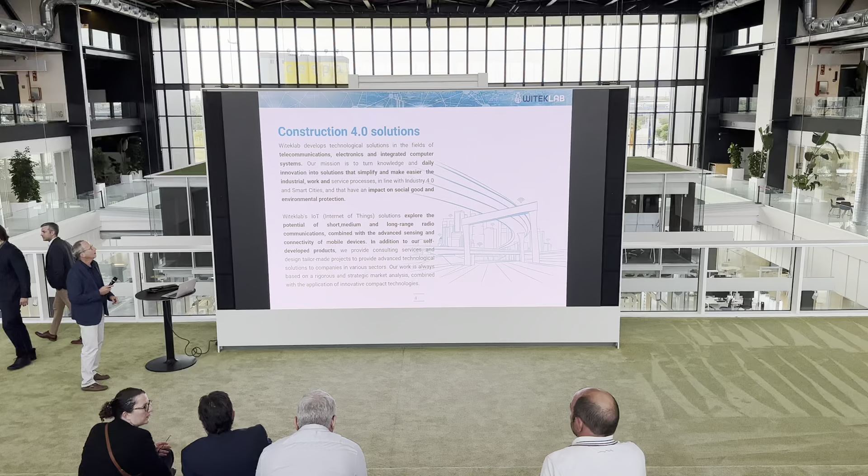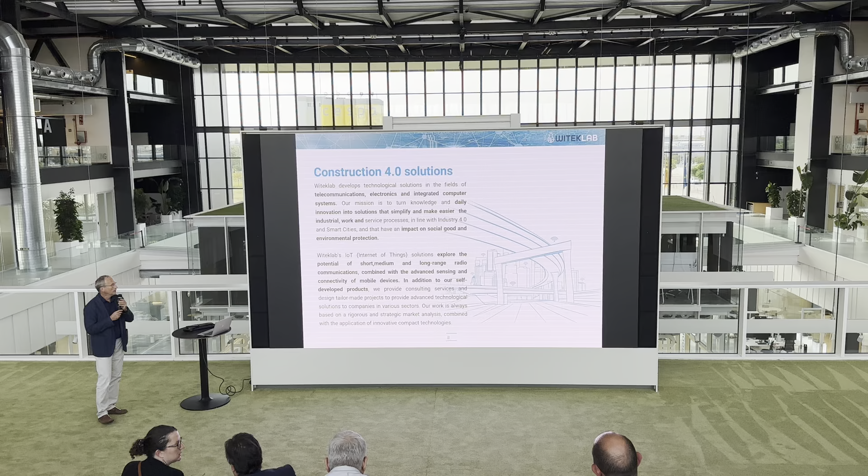Our company has focused on developing solutions for construction and infrastructure. Our philosophy is, in comparison to other presentations before, that we are a hardware-based company but we also develop software to provide the data to the customer. But mainly we do a lot of research in developing very innovative sensors that are difficult to find in the market. So we implement IoT solutions, software, gateways, and on top of that also the platform and cloud solutions.

Our main strengths are smart sensors. We already have some patents because some physical phenomena you need to really go very deep in detail and be very innovative and creative. This is why we have many projects with universities here in Spain and outside.

Radio communications, because at the end we want to send something, get the data and transmit it in different environments. Infrastructures are not very nice, somehow welcoming environments where we can communicate everywhere, anywhere. We need to communicate sometimes, get signals with a passive sensor from underground, or in the concrete. When the concrete is pouring, there's a lot of water, and everybody knows that radio waves don't communicate in water. So we try to get the signal out of that environment.

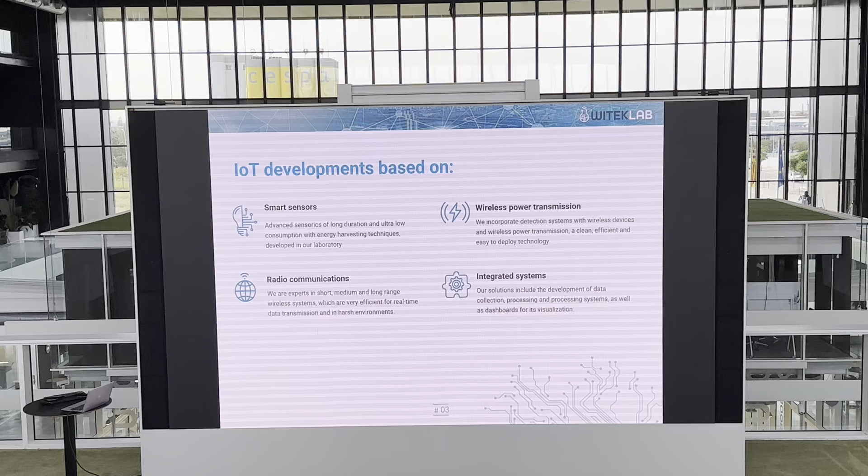In some sensors, we play around with wireless, transmitting not only information but power, and integrate the systems into a platform, integrating everything to provide the global solution to the customer. So from the sensor to the data. Maybe someone will then work on the data to optimize, but we need to show the data to the customer.

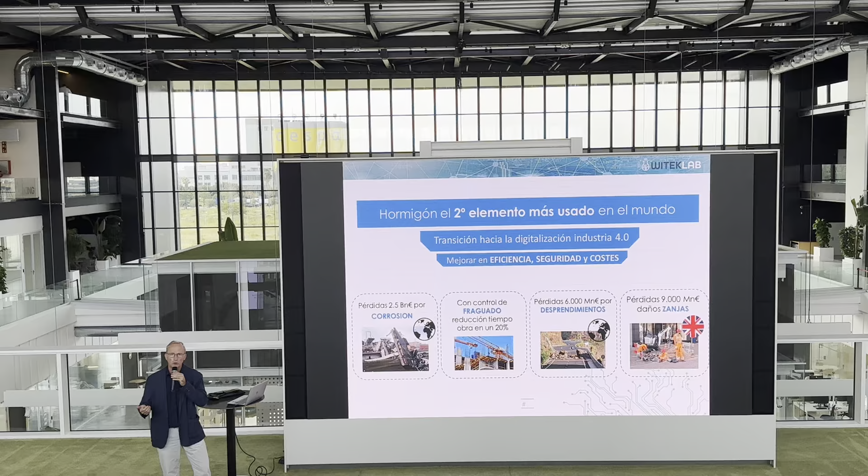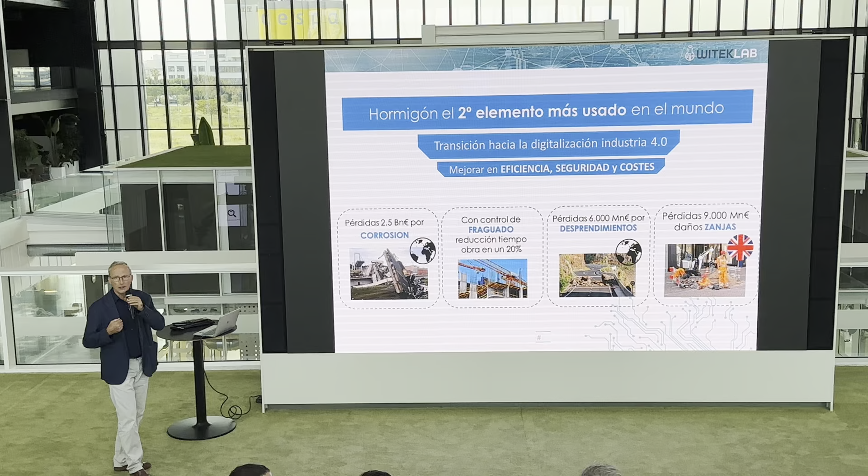The concrete is the second element most used worldwide, the first is water. Concrete really needs to integrate into this digitalization in construction 4.0, what is known now. Our aim is to improve efficiency, security, and cost for the company.

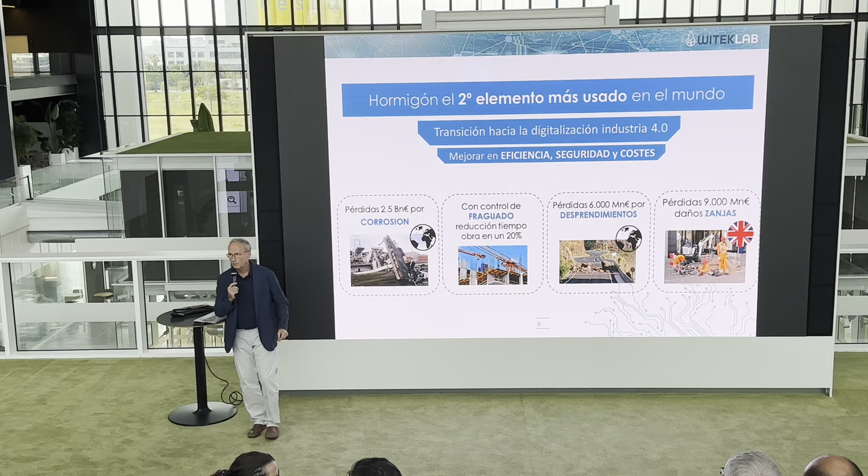So introducing sensors, for example for corrosion, which is one of the most critical problems in infrastructures nowadays, because it costs a lot of losses worldwide. It's computed at like 2.5 billion euros of cost losses for corrosion problems. Let's say a bridge gets corroded, it can go down. A lot of buildings and constructions can really have this problem.

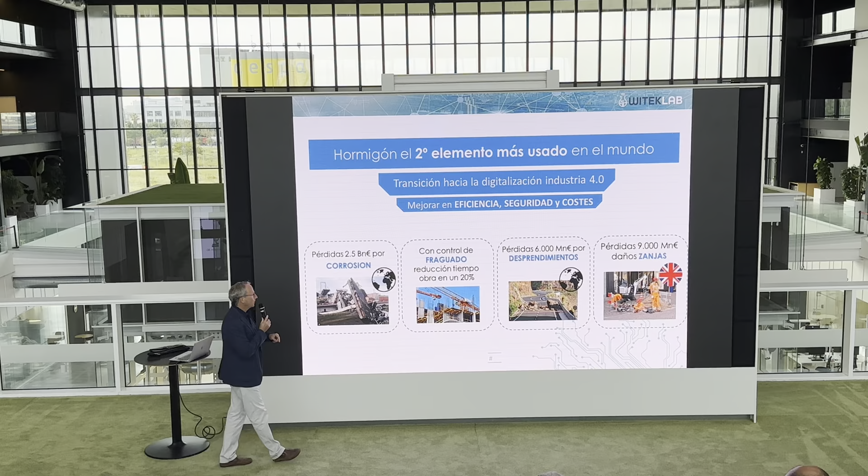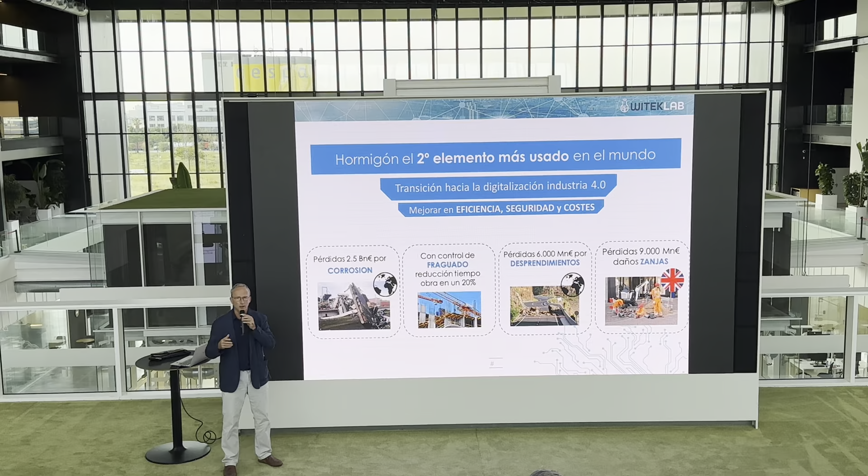This is concrete. When you make a building, you need to pour the concrete, and the concrete starts to gain some strength. So what we do is we monitor this strength instead of doing it in the laboratory by breaking specimens. We integrate some sensors, locate them in special parts, and then we are monitoring what is the strength of the concrete. And here we can improve, as I will show you later, the efficiency of construction, the time and the cost very fast, like 20 to 30 percent in some cases.

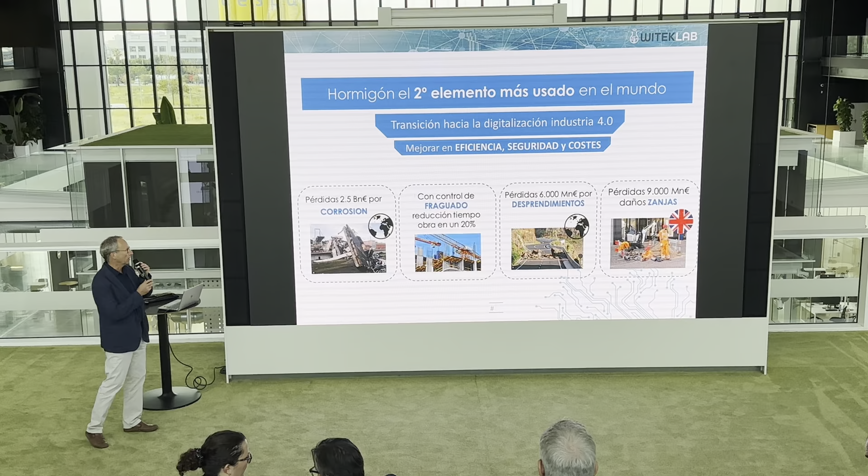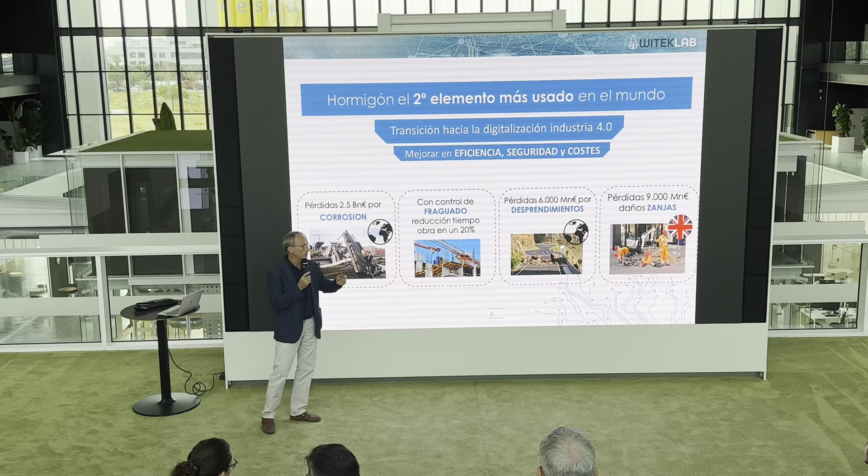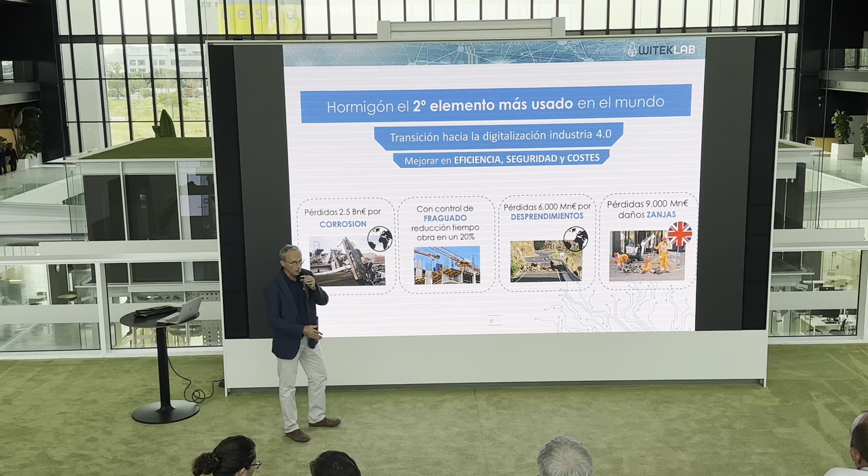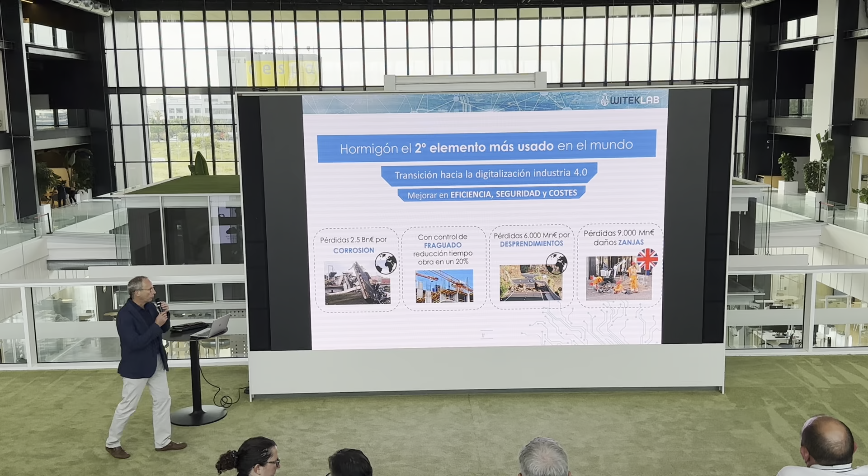For falling rocks in the mountain, there is also a lot of causes due to this in roads, highways, and trains, which can cause rocks to fall onto the road. For digging trenches in the street or in the field, there is also a high cost of losses, and the UK has put values of 9,000 million euros per year on this. That's the cost not only for damages, but also for prospections, how much time you close one road, what you have to tell pedestrians, avoiding them going through that. So all the nuisances for the citizens, etc.

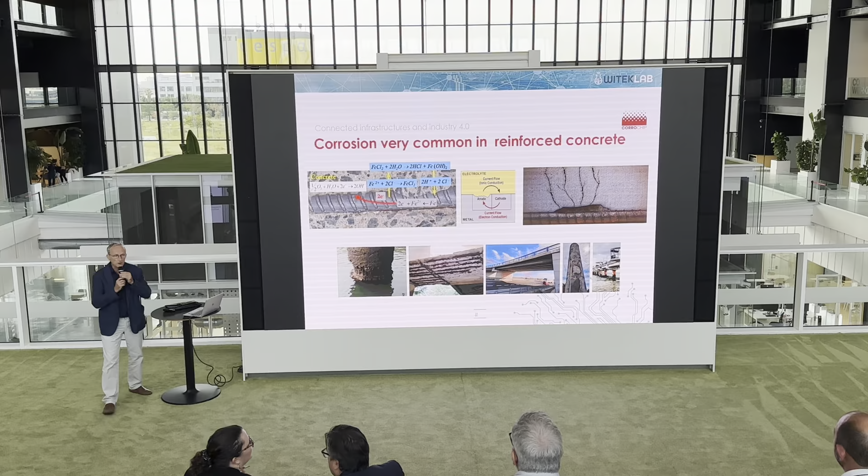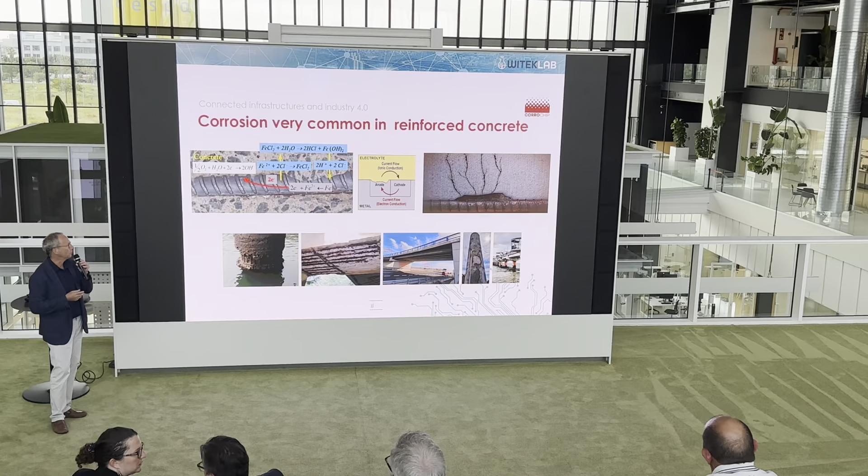For that, I would like to start first with corrosion. To understand a little bit, I guess you already know what a construction looks like without the concrete, when it's already falling down. Why? Because there is a current flowing through the metal. The metal is the one that gives you the biggest strength of the building or structure. So civil engineers make calculations, simulations, whatever, and they put some metal rebars, and then you pour the concrete.

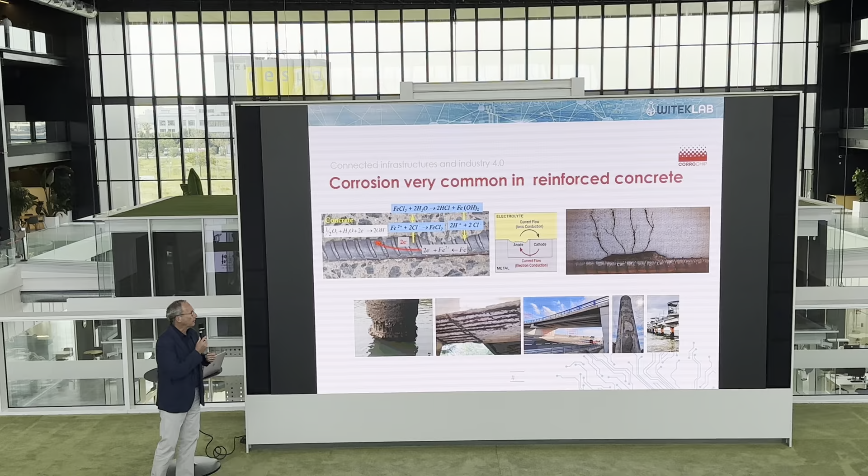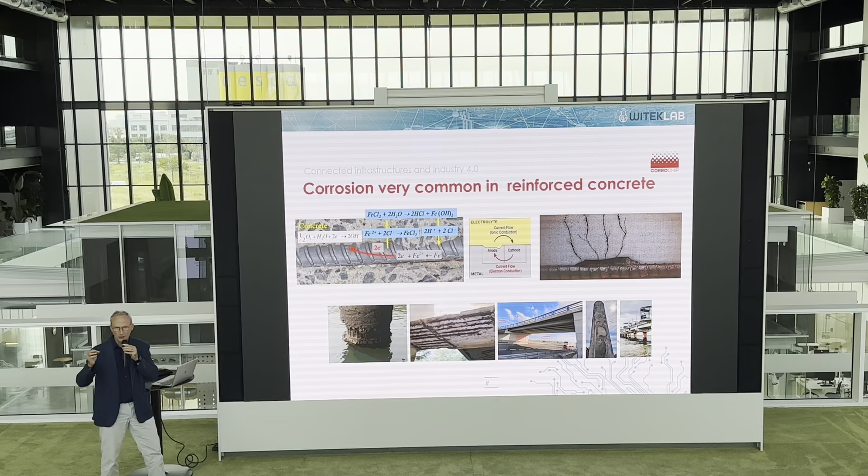And you expect that there is resistance of that building for many years. But what happens sometimes is that there are some cracks, you are close to the sea, you have salt, there are lorries on the bridge that are causing micro damages in the concrete, and there is a penetration of some agents which can cause a current flowing through the electrical parts of the structure. What happens with this current? It starts to oxidize.

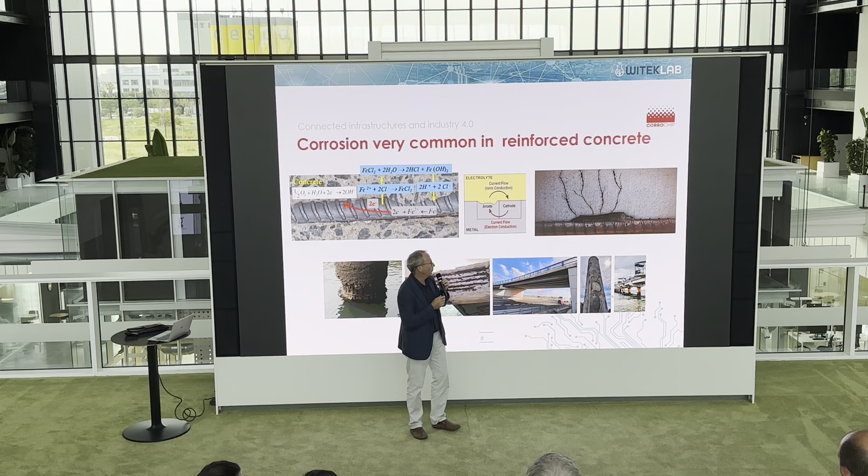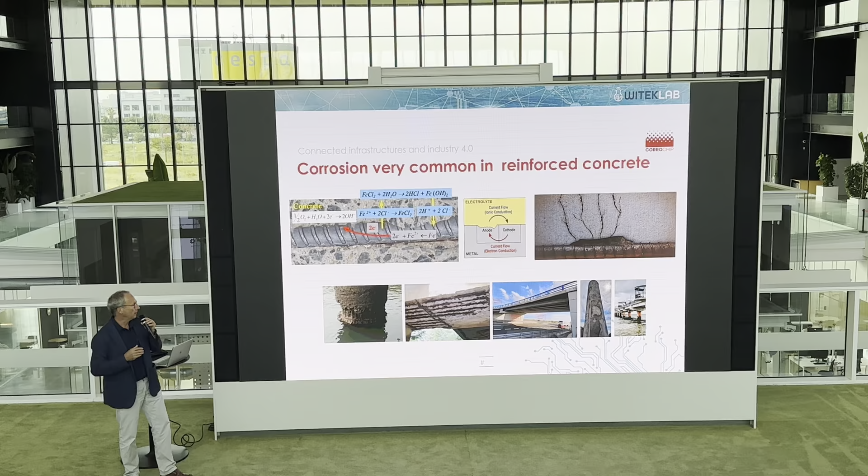When there is oxide here, two things happen. One is that the concrete cracks and can break, and the other is that the thickness of the metal decreases. So instead of having like 20 millimeters thickness rebar, or 30, 35 depending on the calculations, this goes down, and then it can become dangerous for people next to the buildings or next to the infrastructure.

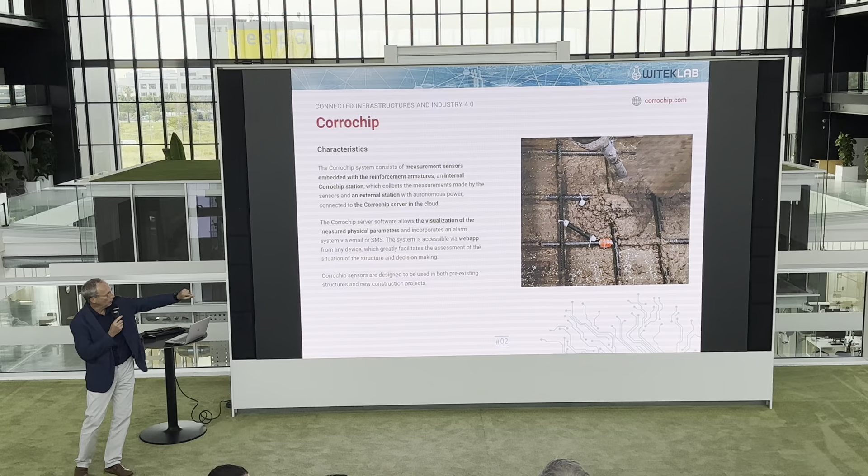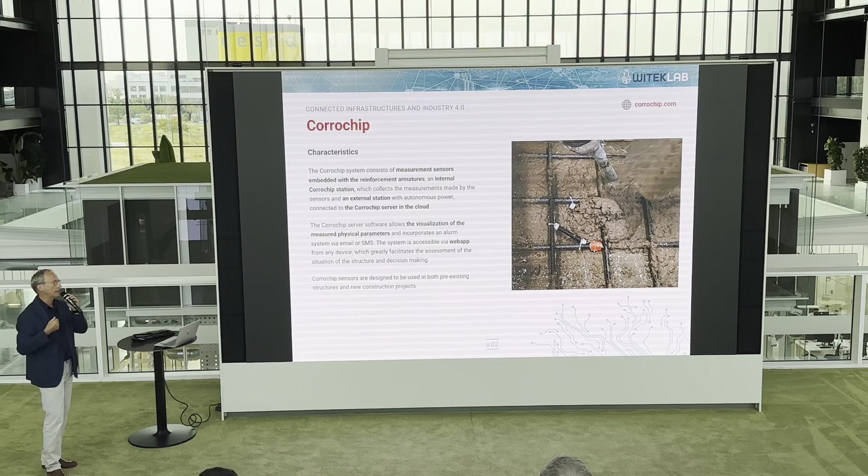So what do we do? We measure in a way that until now nobody has done, because we integrate the sensors inside the structures. If it's a new structure, it's very good because we have some sensory elements that can be tied to the rebar, and then you pour the concrete. You get the cables out, this is the cable solution, so we put the cables outside, and we start monitoring the currents inside from the first minute of the structure, of the building.

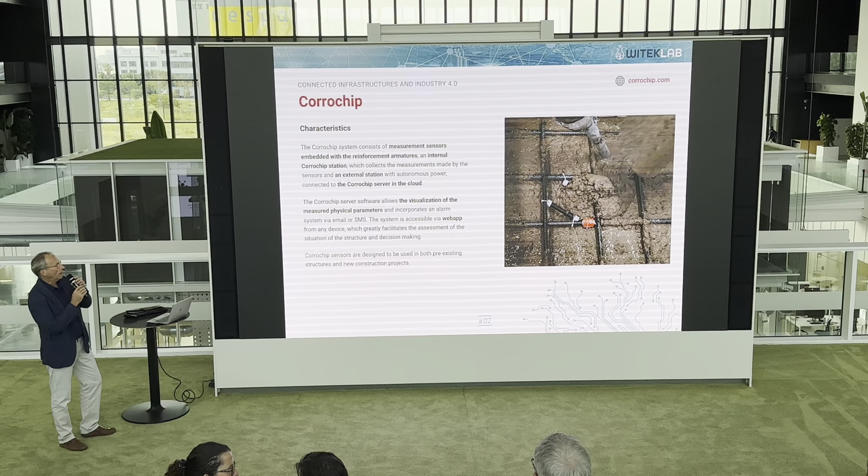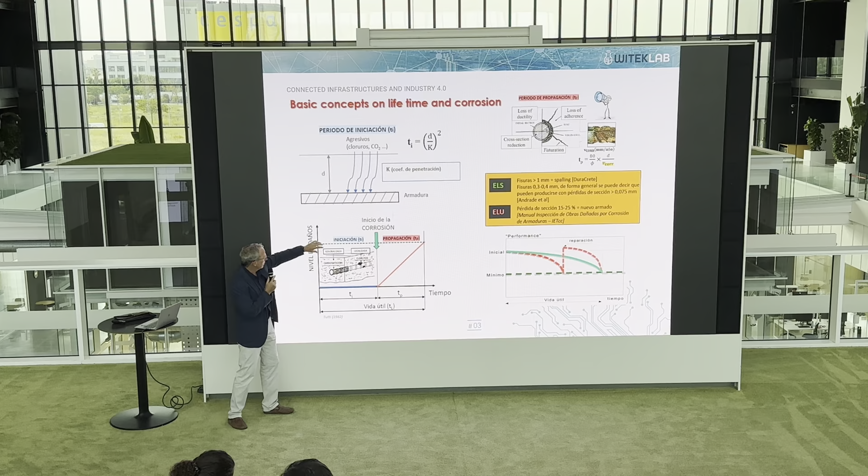We have several different types of what we call electrodes, so they measure different things, the different parameters. All of them are passive because they must last the whole life of the structure. This is the physical meaning of this. We published many papers on this, but the idea is: can we start measuring the penetration of the agents that contaminate the rebar, and also, when there is a current here, calculate the corrosion in the rebar?

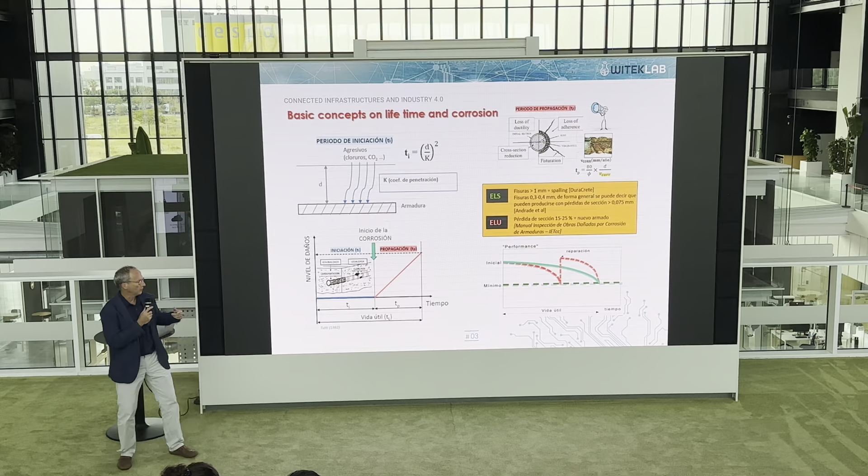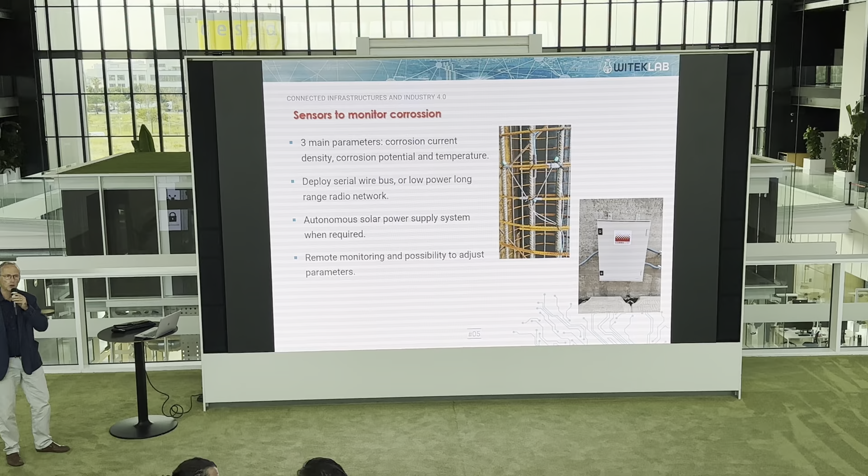So we have two sensors. One is to detect when the agents start to penetrate the concrete, and another one when they are already in the metal rebar. Okay. Our solution started more than 10 years ago with some PhD theses. Then we developed the first prototypes together with CSIC, the research center of Spain. And then we already implemented some pilots.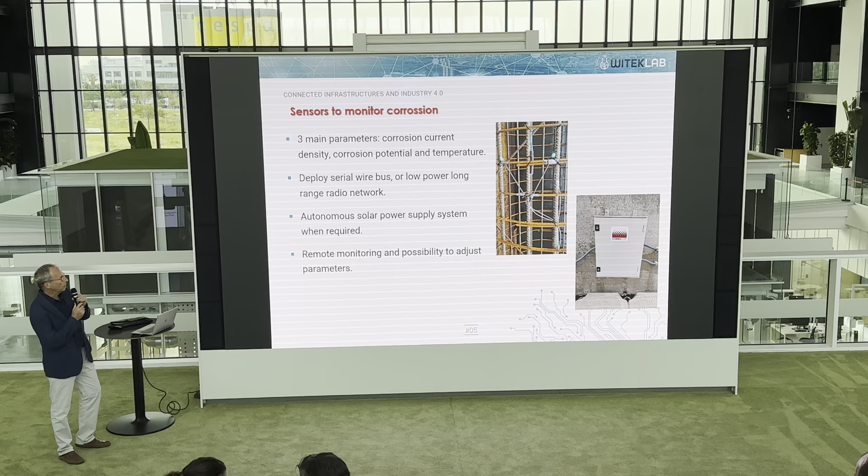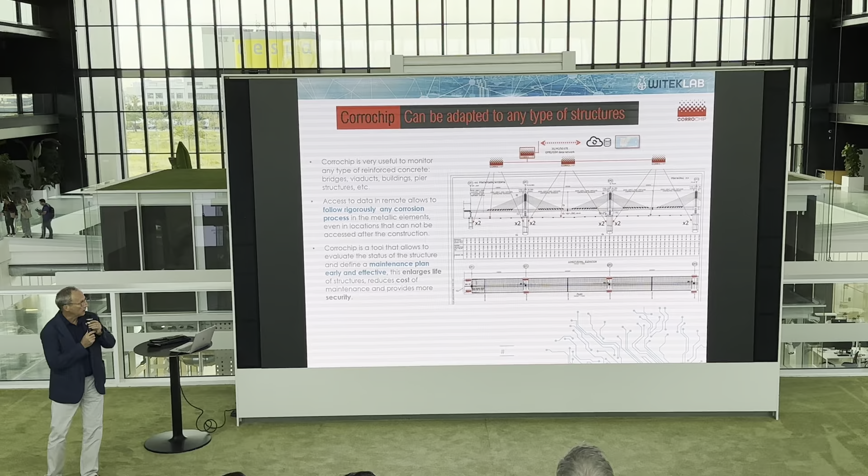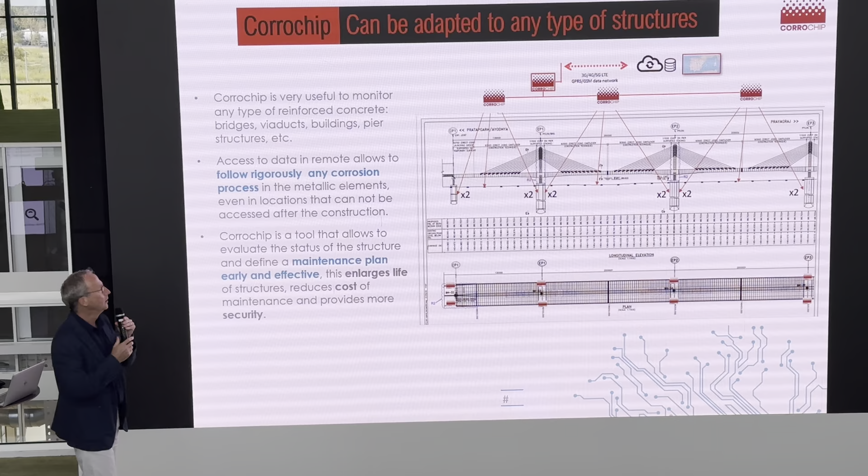These are pilots in different areas. I can show you, for example, this is a bridge where it makes a lot of sense, but it is a new bridge. So people ask, okay, where can we put the sensors? How can we monitor not only the place where the trucks, the lorries, the cars will go through, but also the pillars? This will be underwater, so can we measure underwater? And then we start working together with the architects and civil engineers to place the different sensors.

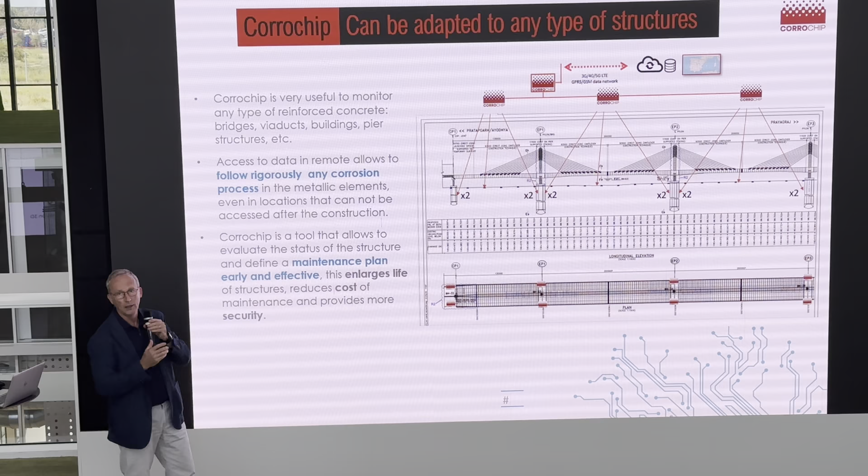If it's a new structure, it's very easy. For us, it's easy to go there and in one day we can already install many sensors. If it's a structure that has already been damaged, we can install it, but it takes more effort, because we need to put the sensor inside. So we need access to make some drills, then have some contacts, put the cables outside, the data logger, and then we already have the data. Then we show them on the platform. Okay, this is a dashboard that we use. Yes.

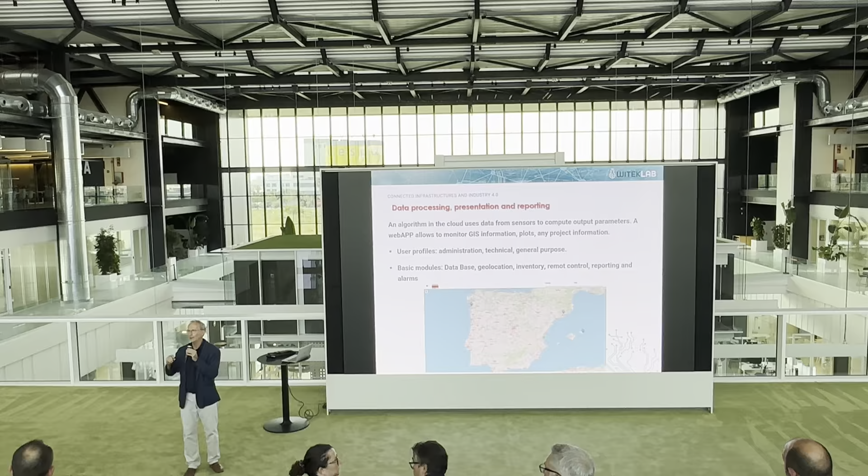Yes, yes. There is an electrode, the sensor is inside the concrete. We put cables outside, and we have a data logger. There is a small electronic unit that does the measurements at every different point. In this case everything is wired, so sometimes we reuse wired communications in the bridge, for example, or we create a new wiring system, because we need to collect all the data from the wires to a central station that sends it to the cloud.

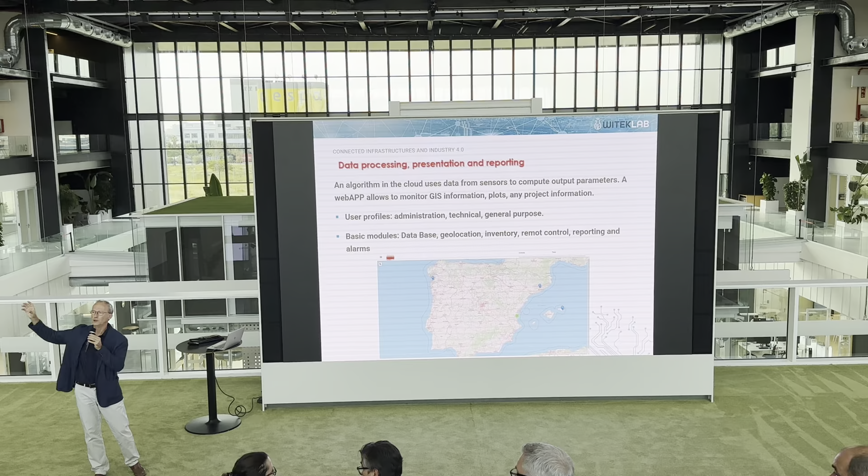But the sensor inside is passive, it's a kind of electrode that we make, with no battery, and it will last as long as the structure. What needs maintenance is outside: the data logger, we need to do maintenance on that. It has a life duration. If it corrodes itself? Yes, this is what we do.

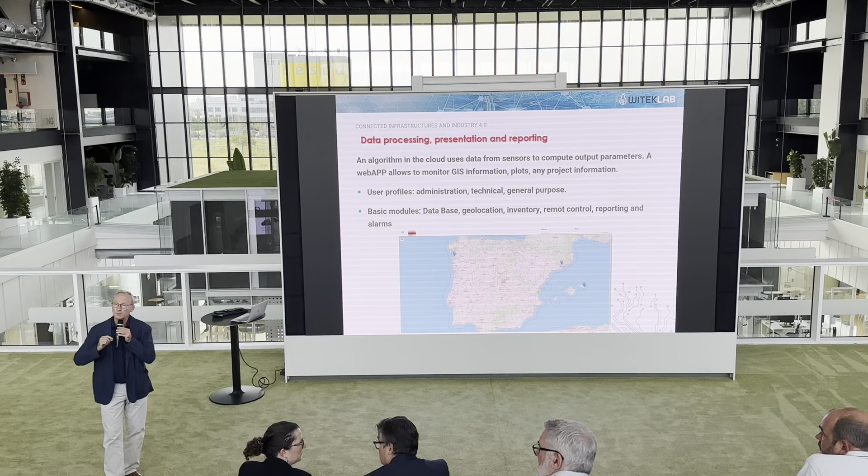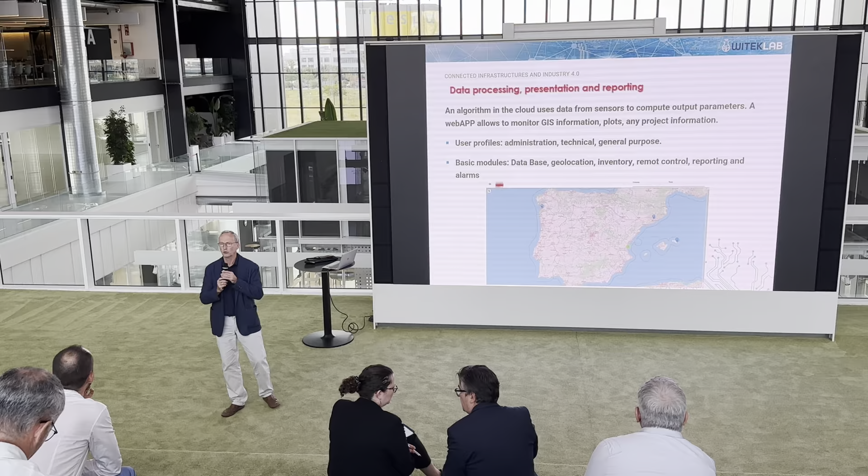We measure the speed of corrosion, the corrosion current, parameters that nowadays are quite difficult to measure, because what people do is manual inspections, go there to measure the corrosion voltage or potential, and then go back half a year or a year later. What we do is one measurement per day, so we can see the speed of corrosion, how this speed progresses, and then we can give a warning. So in some installations, at some points, it's better to do maintenance to extend the lifetime of, let's say, a bridge. Maybe much more than the lifetime of the sensor itself.

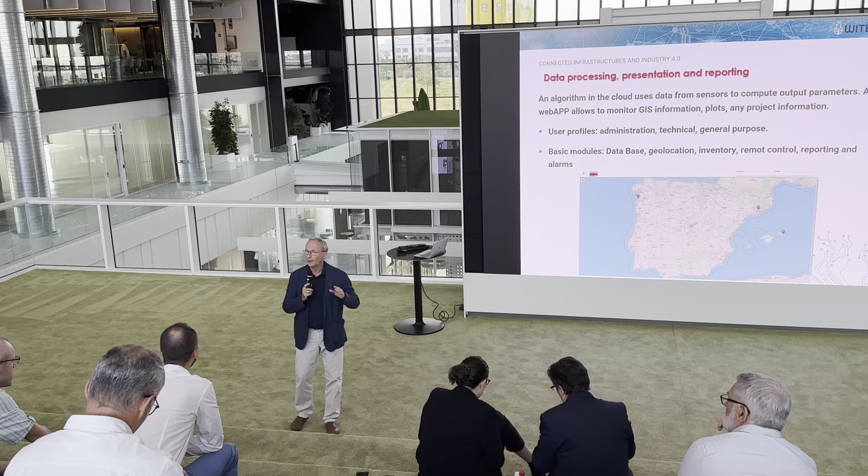It will end. It's the same material as the rebar of the structure. So our sensor is made with the same material as the rebar, but new. So if there is a metal rebar with some alloy or some aluminum, whatever, we do the same. So if corrosion happens at some rate in the infrastructure, our sensor will corrode as well.

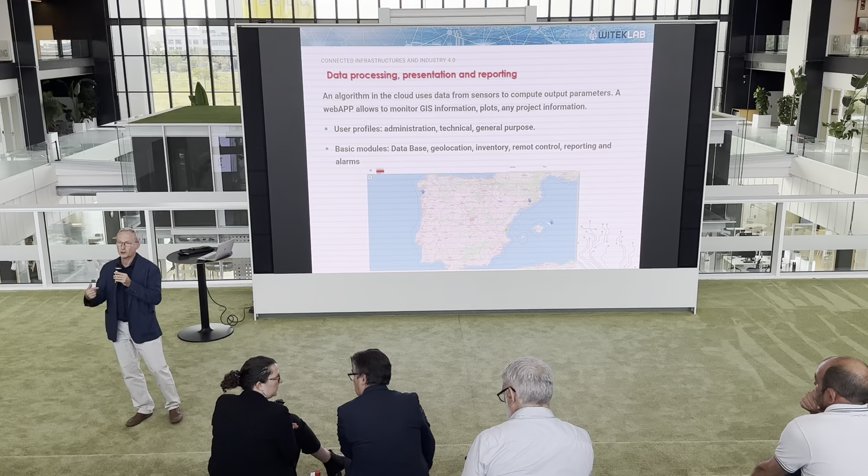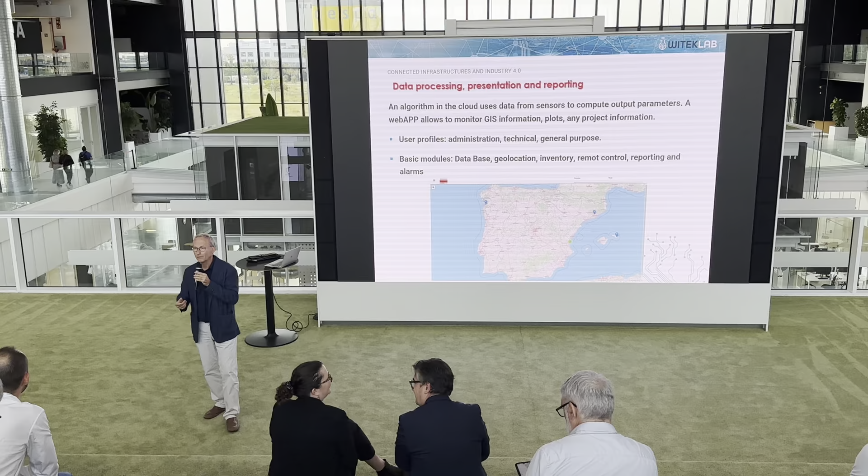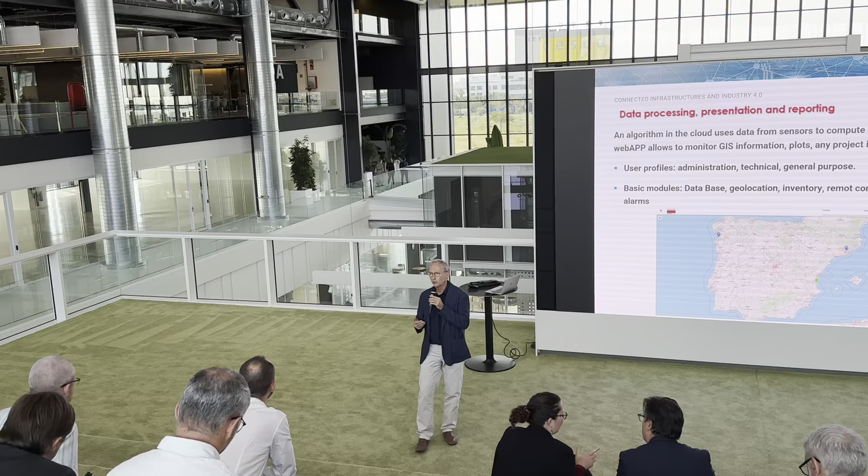We have patented the way to introduce the current pulses so as not to affect the currents inside, because if you inject some current, you can affect the speed of corrosion. So we need to inject a pulse to do the measurement without affecting the system itself. This is our main idea. Our sensor will corrode as well. What's the life duration that you guarantee to clients?

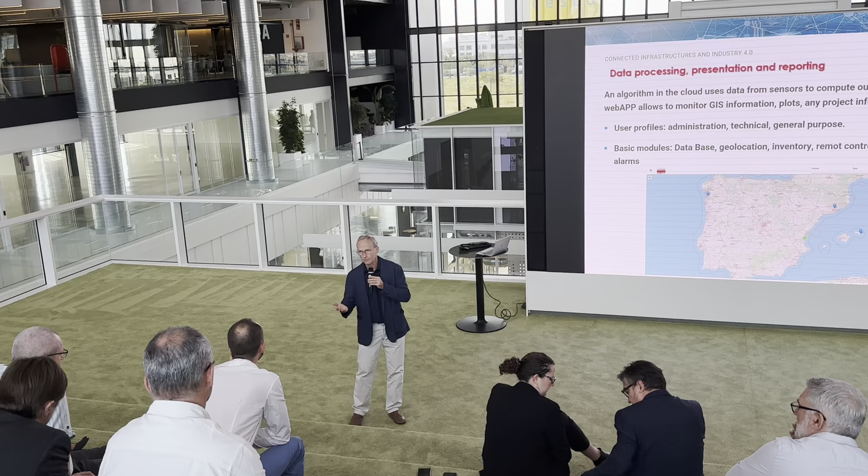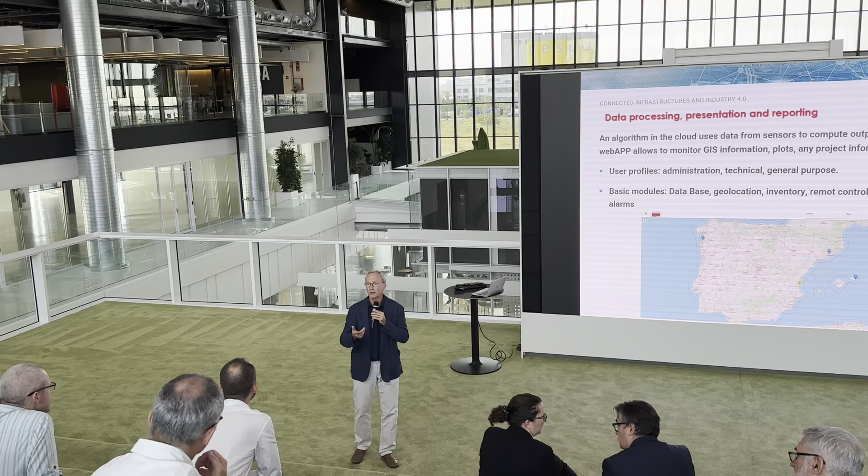If the bridge, for example, lasts 30 years, our sensor will last 30 years, or 15 years. The important thing is that the corrosion or erosion of our sensor will be exactly the same as the structure. What needs maintenance is the electronics outside, because some systems are solar or battery powered, and we need to maintain that.

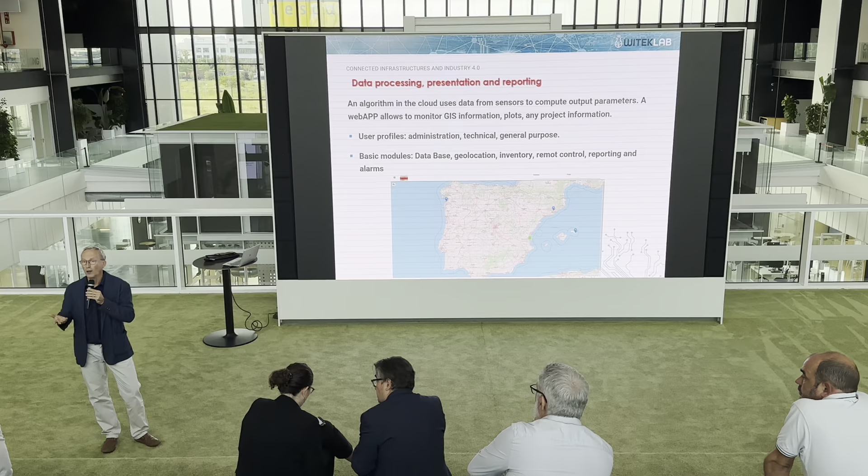But the sensor itself, if there is corrosion with, for example, a loss of thickness of 3 millimeters, our sensor will degrade the same, but it will work. Why? Because of the way we measure: we do one measurement per day, we send some pulses, do the measurement, sleep, and the next day, the next measurement.

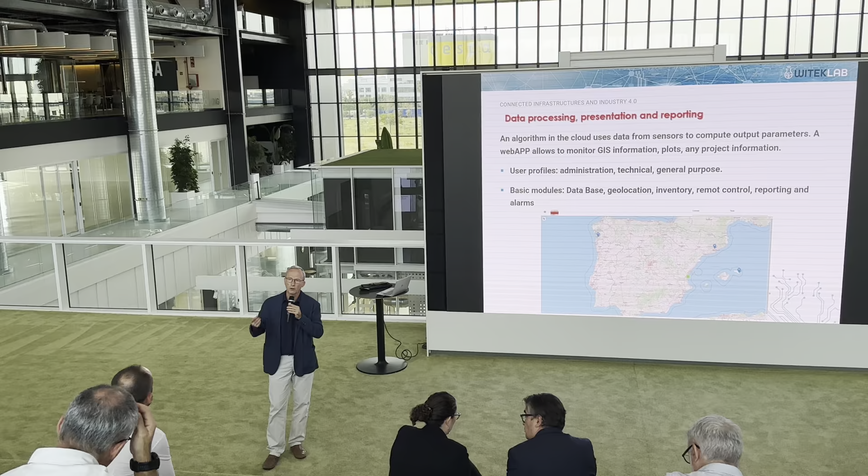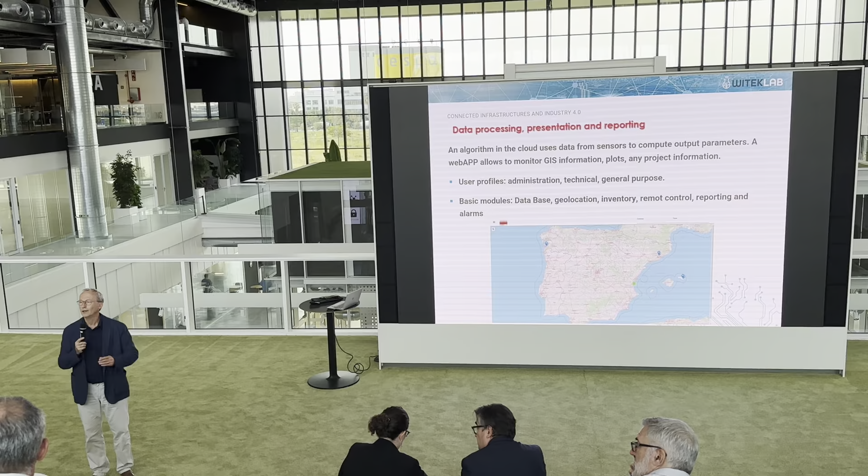To be sure that I have understood: your sensor is made of the same material as the structure, so it corrodes and you measure the corrosion of your sensor. Yeah. So if there is no corrosion, our sensor will not corrode and we will measure nothing. And then if there is some corrosion, we can start measuring it, and the speed of corrosion. What is the micrometers that we lost per year, for example?

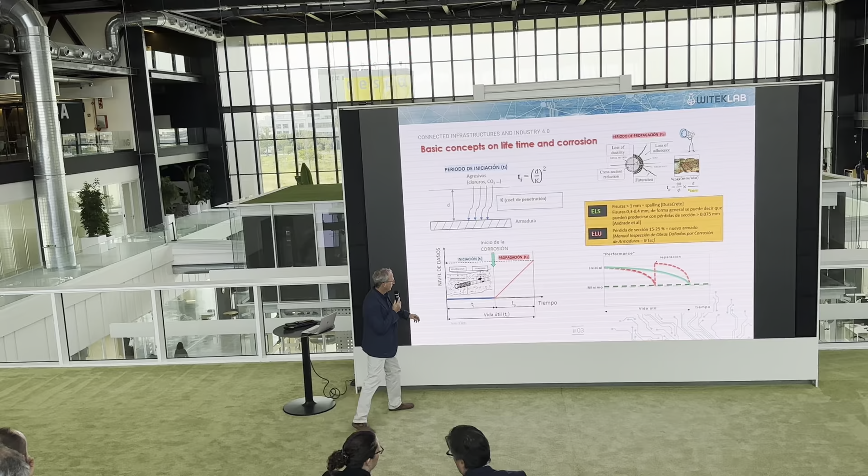This is very important because people can already foresee what repair they need and say, okay, in 3 years maybe I go. Here, maybe this is more indicative. There is the lifetime of the sensor, and maybe you can still spend 10 years without any corrosion at all.

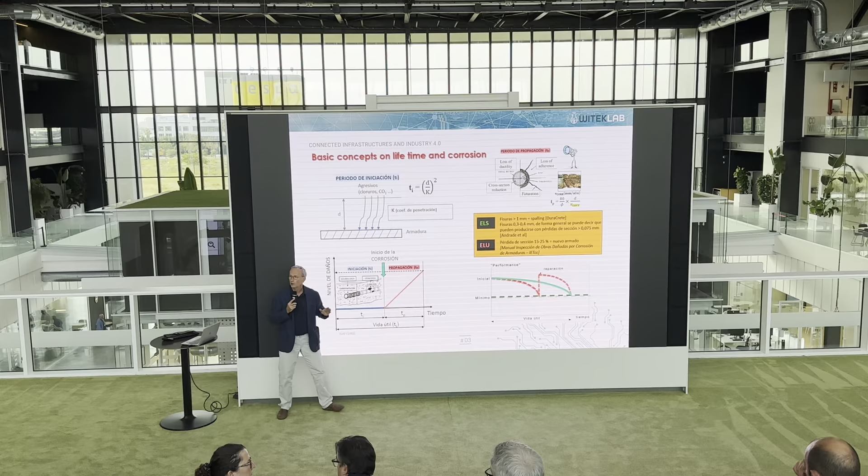And then there is what is called the propagation phase, where we have a loss of thickness. This loss of thickness can correlate as well with the currents that start flowing through the structure. And if there is a point where these currents really start going high very fast, we need to inform about that, and this is the critical part.

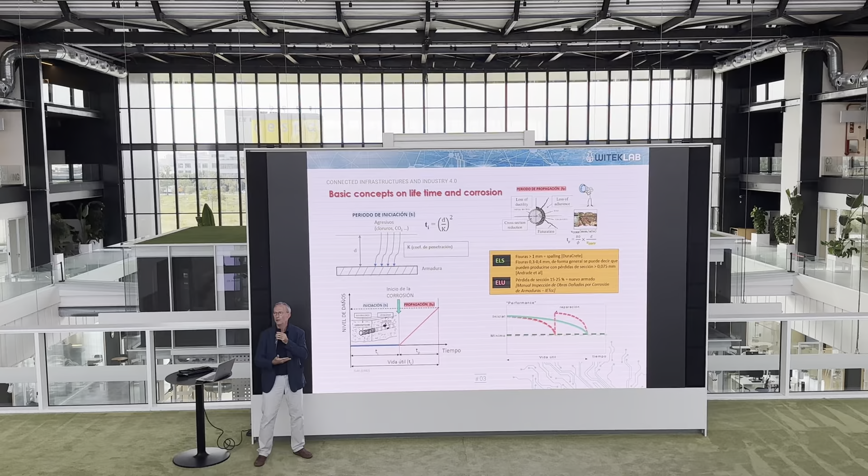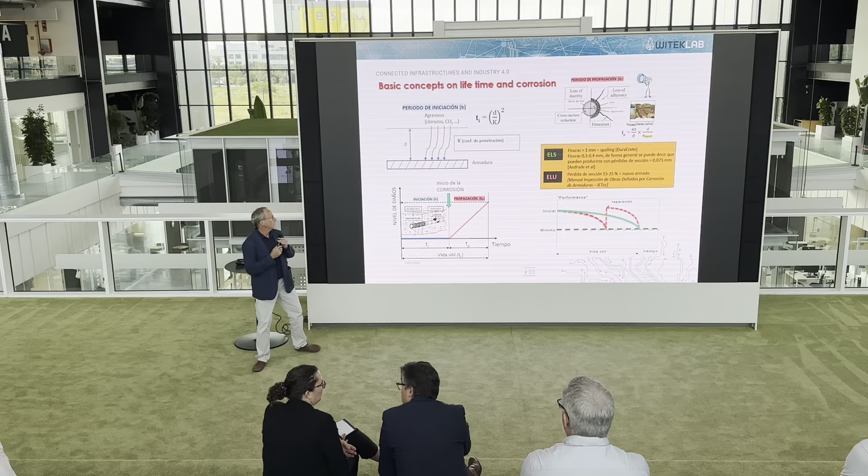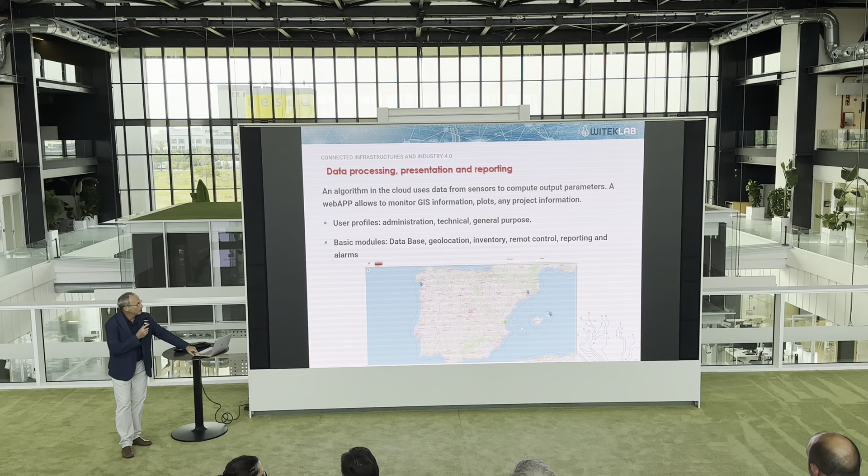And then it's better to repair it, to fix it, and then you can extend the life of the structure for many years. So the important part is to be able to measure this initialization and propagation. Okay, then we put this into a dashboard as well. We send automatic reports every 3 months to our customers, so they can know if there is an incident. For example, solar power sensors, gateways that take the data.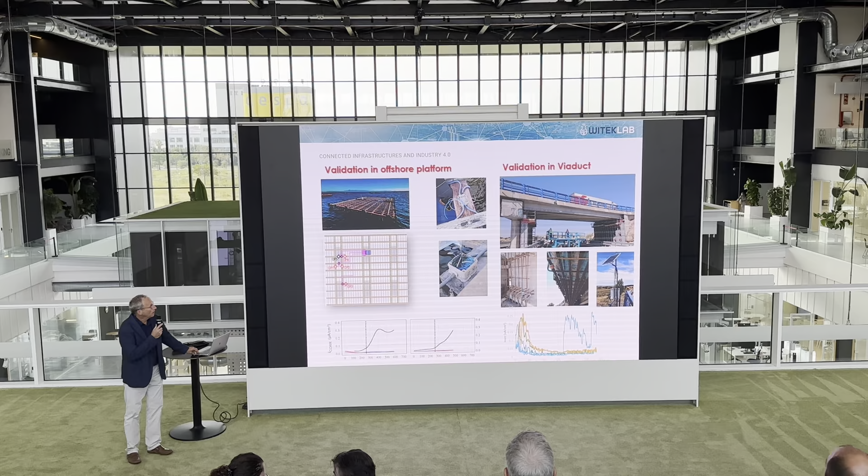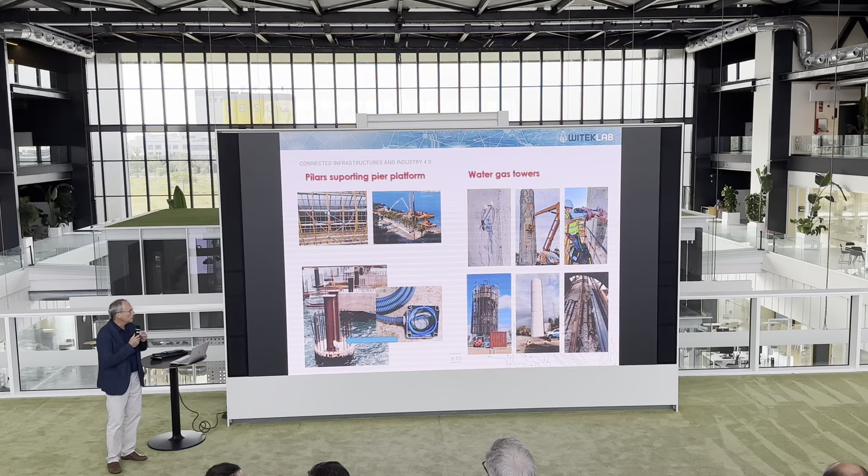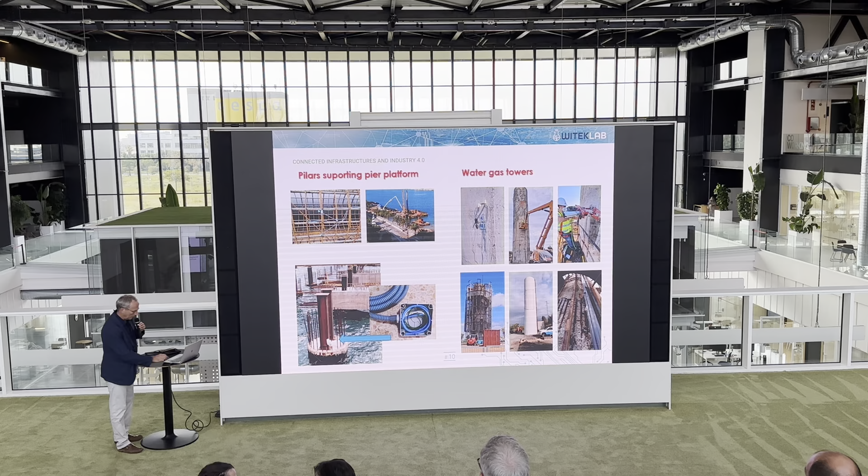Of course, we have already implemented this in different real use cases: highways between Madrid and Barcelona, on the ocean for mussel growing platforms, in the pier in the Balearics, in different places. We are starting; we passed the pilot, now we are already selling this, so we are now growing a little bit with more demand to install these sensors, because this has already been validated, I will show later, with the main companies in Spain. And okay, for corrosion, that's it.

Maybe I will go only 1 minute. I go really fast, maybe. 2 minutes. Okay. Thank you. I will go through that very fast because I have also many slides,

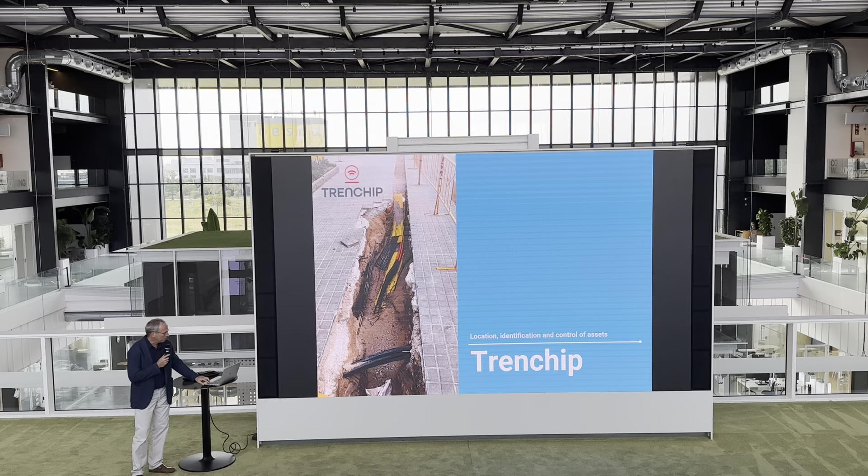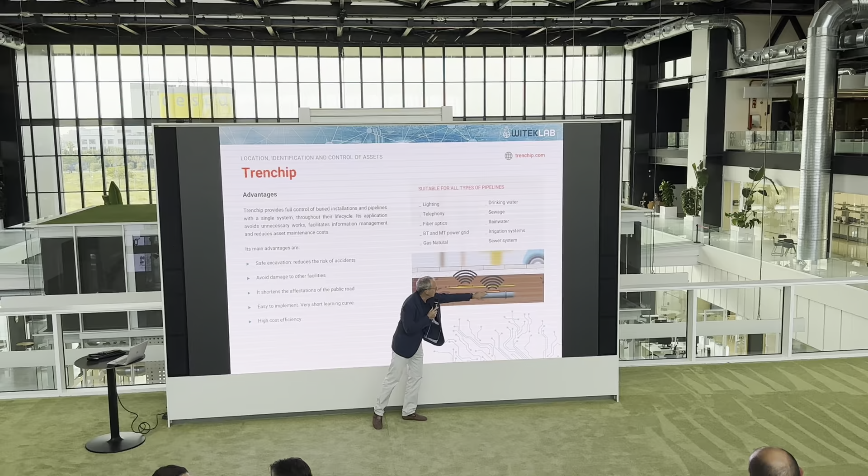but just for you to have an idea. Trenchip: what we do is we put a chip on the pipes underground. Okay, this is passive. It's like RFID. We optimize the antenna design to get the signal very deep. So then what happens? We can digitalize the underground structures because we can detect not only what you can find underground, but also all the information related to the utilities: gas, water pipes, electricity pipes, fiber optics, etc.

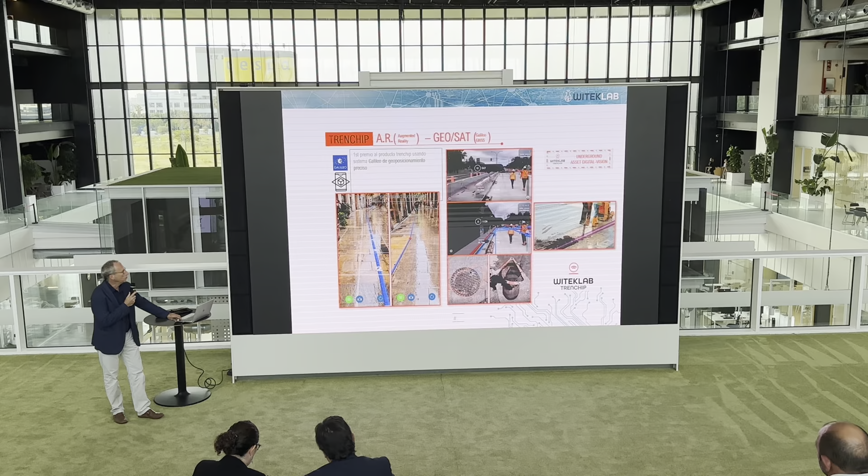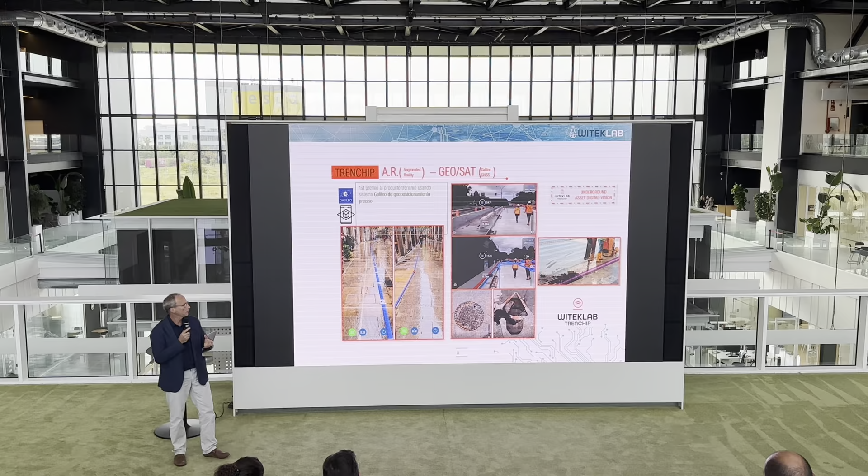The same, we put this into a platform, and on top of that we also create the augmented reality image. Once you detect, for example, in this manhole, you can put a Trenchip, and from here you have a 3D image, you can have the starting point, the intersections, different types of pipes for electricity, water, whatever. So we somehow digitalize something that people don't normally see.

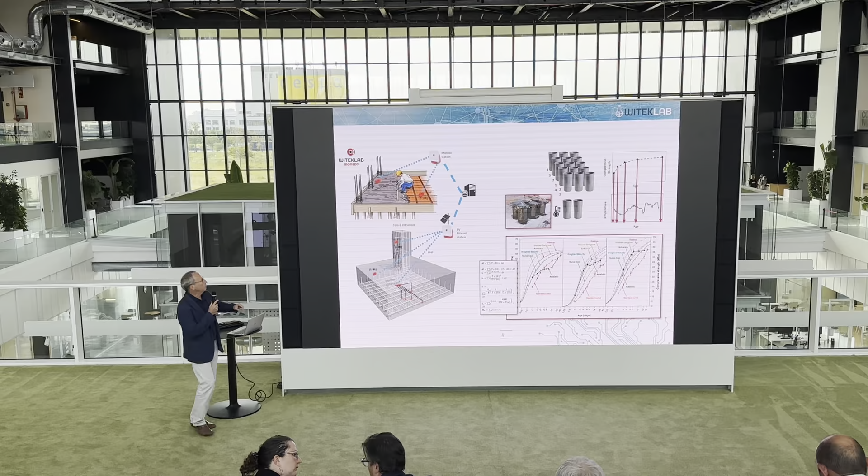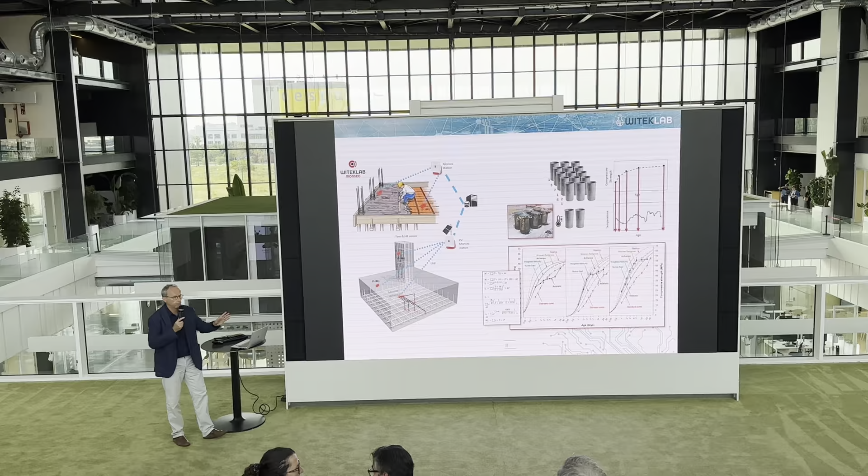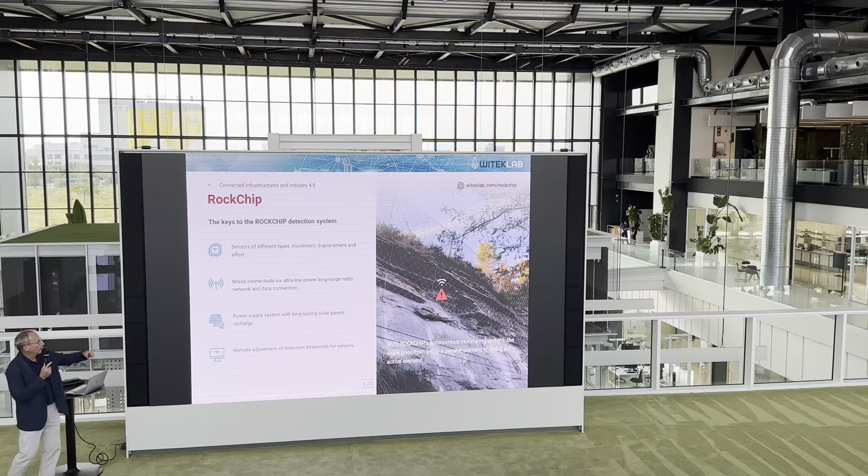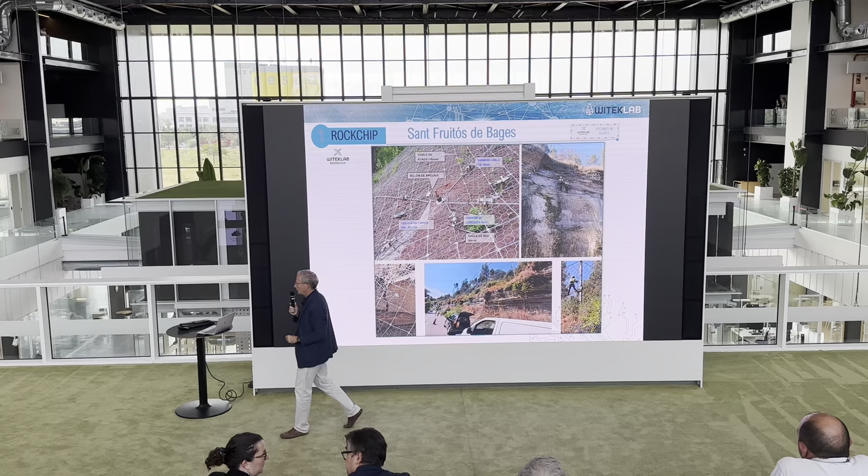Also the platform, and RockChip is the last one. We put sensors to detect rocks that can fall down onto the road. So we have different types of solutions for that, different types of sensors. At the end, we get the data of all the sensors, and our idea is to see if any of these anchors has broken. Sometimes there is a movement. We locate this in the special places where there is some danger, some stone that is going to fall down. And we monitor all these possible dangers in order to avoid accidents on the road, and on the train, etc.

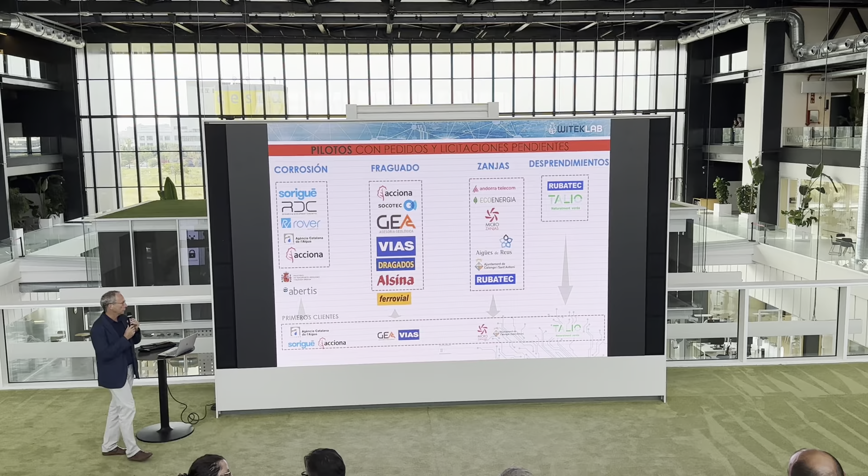These are some of the pilots that we have already implemented, but as I said, from pilots we now go to customers, and we already have some customers, and people so far have good feedback on those sensors.

Okay, thank you, and sorry for the extra 2 minutes. If you have any questions, 1 or 2 questions, we have time now.